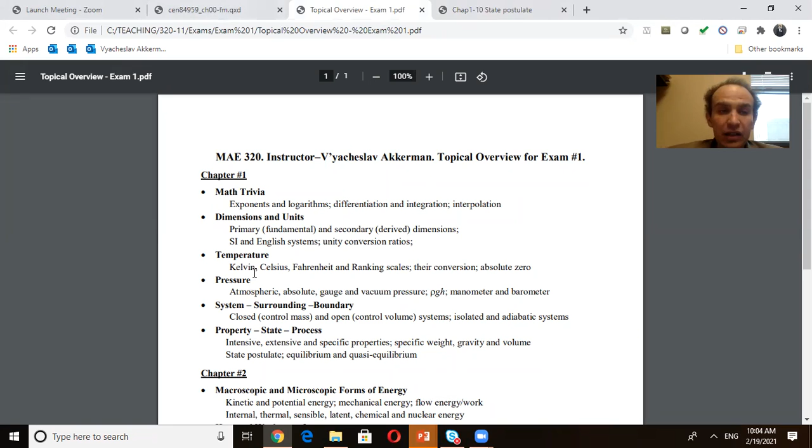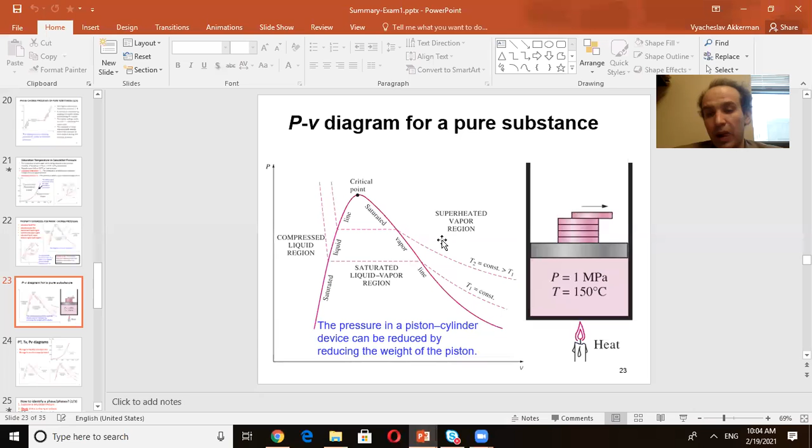What else did I send you? I sent you summary slides. This summary is really the essence of what has been in 3 chapters, just a brief summary. Now, please don't get misled and don't overamplify the material. The worst scenario is when you prepare for your exam based on my summary slides and nothing else. Then you fail, believe me. If you ask me the morning before the exam where your property tables are, I will tell you where they are, but you fail. You will not have time to complete it. You should do everything else. You should practice a lot. The summary slides are your last source for repetition. On Thursday evening or Friday morning, it's good to go through them to repeat. They are not to replace your textbook and my lectures, believe me.

Now, if you are not prepared, and you need something, it's still some source. If you don't have time to read your book the night before the exam, okay, you still have the slides to go through and try to get some reasonable score. That's my help. But please don't overamplify it. Your key point: do your homeworks, do them yourself, and then it will be okay.

If you understand when I'm solving a problem on the screen, or if you understand my solution of your homework, that's great. It's better than if you don't understand it, but it still does not guarantee that you solve this at your exam. After you see the solution, you should close it and solve it yourself from scratch. Only in this way can I guarantee that you will do it yourself at your exam.

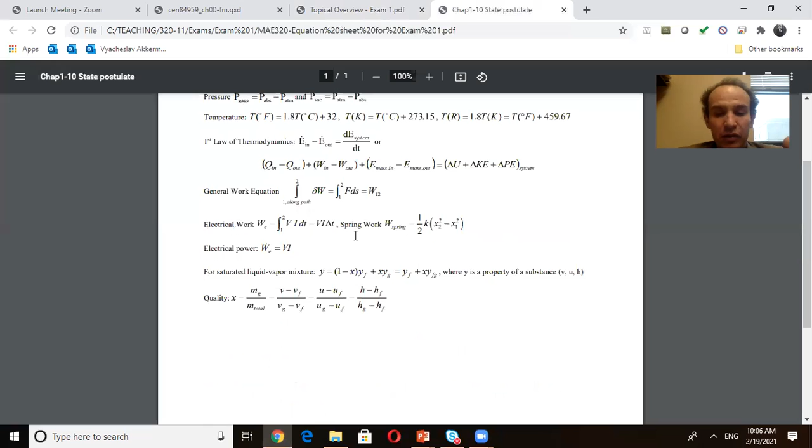Okay. Now, another thing I sent you is what we call a list of equations. First, this is tentative. Basically, you are expected to write your exam without any notes; you should memorize everything. But I know it's difficult, so we allow a list of equations of up to 1 page, which will be included in your exam. And it may be different from this. What I sent you here is tentative, okay? It's tentative, but it's fruitful for you to take a look to make sure you know it.

And please, don't blame me later saying, I was preparing based on this list of equations and you gave something else. Yes, I may give you something else. Your knowledge should not be limited by the summary slides, list of equations, and topical overview. Everything from chapter 1 to 3 can be there, believe me. I am here to help you, but I am not replacing the whole exam. So please realize. Okay, does it make sense? Any questions?

Now, today we are completing this chapter. We almost completed chapter 3, and you are ready to do all the homework except the last problem. And today we will be talking about ideal gas. And I told you in advance before we start, what are the conceptual mistakes students make?

Because ideal gas is the last topic of this chapter, and then you will have an exam, people will use the ideal gas law anytime, anywhere. You apply the ideal gas law for liquids, for solids, for ice, for whatever. So please realize, you should use tables. Tables are your major source. Ideal gas happens very seldom. Most likely, your substance is not an ideal gas. And if it's an ideal gas, it should be justified.

Does it make sense? So don't use ideal gas unless you have some understanding of why you should use it. Do you agree? Do you understand this? Okay, great. So, questions?

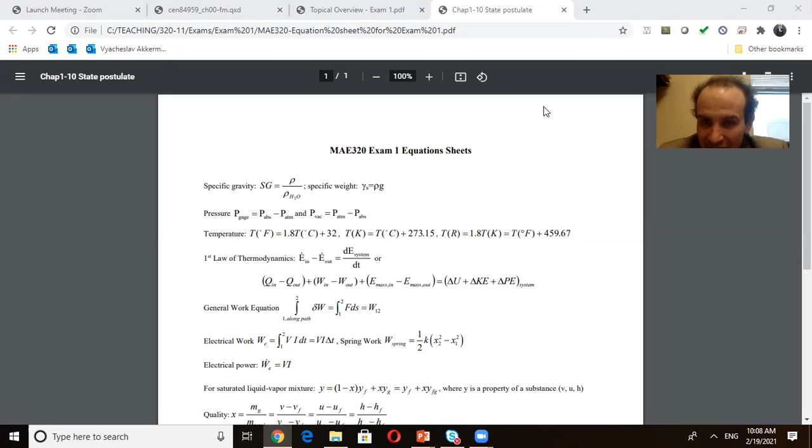Yes, the exam may require drawing of PV and TV diagrams. It may require. And also, again, I told you, identification of phase and the ability to identify the state on PV and TV diagrams. It's a major assignment you may have from chapter 3, right?

That's most important. So let's go back to part C of the slides I sent you yesterday, or you see it on my screen. We will talk about properties of ideal gas. Our objectives are to understand how to apply the ideal gas equation, and also to distinguish ideal from non-ideal gas, which is even more important. Most of you know the ideal gas equation, but to distinguish ideal from non-ideal is something new for many of you.

So let's do it. So let me ask you, what is ideal gas? How do you feel it? Please write down or whatever. What is ideal gas? Yeah, you may know it's a model, right? There is no ideal gas in reality, but for some situations, some gases, this is a good approach that we use.

No, it's not gas at saturated point. It's something different. Yes, first of all, you're right that it should be superheated, because it's gas, right? A saturated liquid-vapor mixture or solid-liquid mixture cannot be ideal gas. But not all superheated vapors are ideal gases, right? So molecules don't attract or build charge. Yes, that's great. That's true. And anything else?

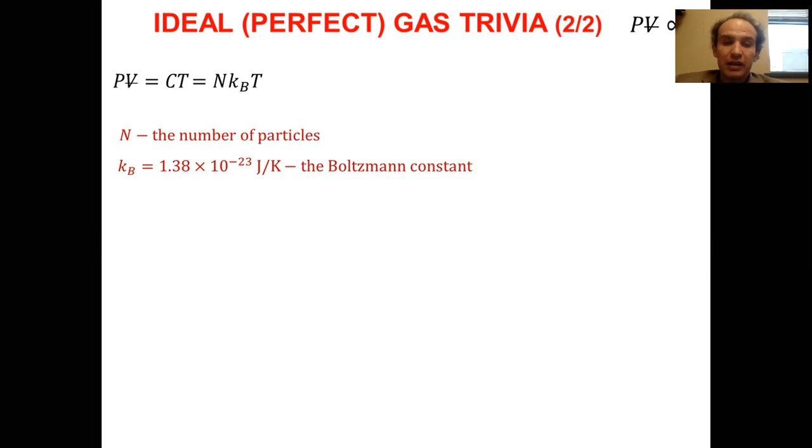And that's a good equation, but typically people don't like to deal with big values and small values, right? Why should I operate with billions of billions of billions of particles? 10 to the 27 is billion of billion of billion. So people sometimes express this formula in a different manner. People express it in terms of moles. So there is a concept of mole. Mole is a reasonable amount of matter we deal with.

So what is 1 mole? Do you remember from chemistry, from other classes? By definition, 1 mole is Avogadro number of particles, of items. I will use Avogadro, the Italian name. Avogadro number is a very big number. It's 6.022 by 10 to the 23. It's almost 10 to the power 24 items.

So realize, 1 mole of hydrogen is Avogadro number of hydrogen. 1 mole of water is Avogadro number of water molecules. 1 mole of students is Avogadro number of students. I'm not joking, it's the definition. If you have this amount of students in the universe, it will be a mole of students. 1 mole of planets will be Avogadro number of planets. 1 mole of galaxies will be Avogadro number of galaxies.

Does it make sense? Why is this number not different? Because it's convenient to use: 1 mole of hydrogen weighs 1 gram, 1 mole of carbon weighs 12 grams, and so on. So we can rewrite the equation like this. Instead of N, you express N as Avogadro number multiplied by number of moles. Here n is the number of moles, we also call it stoichiometric coefficient sometimes, and N Avogadro is for 1 mole. So here you see how many moles you have, and here's Boltzmann constant and temperature.

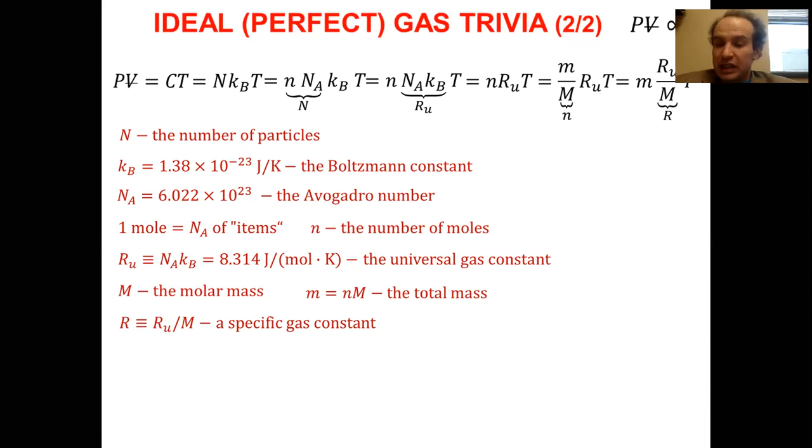But why do I write like this? Then I can rewrite my equation as follows. I have 2 items here, so instead of writing like this, I can take the fraction R universal over M and replace it by another value. So I introduce what we call a specific gas constant. It's tabulated. And then here is my equation.

So please remember, don't confuse universal gas constant and specific gas constant. Universal gas constant is this constant. Specific is when you divide it by molar mass. So specific gas constant for hydrogen is universal divided by molar mass of hydrogen. Specific gas constant for uranium will be 8.314 divided by molar mass of uranium.

Specific gas constant for students will be this constant divided by molar mass of students. I'm not joking, it's true. Although students don't behave like an ideal gas most of the time, but that's by definition. Do you understand this? So now my equation becomes like this, and that's the typical form that you see.

PV is equal to mRT, and recall R is the specific gas constant now, not universal, and T is temperature. Now I can multiply or divide both sides by volume or mass. For instance, if I divide both sides by volume, this will be my equation: it's m over V RT, it's rho RT. And that's mostly what you see in physics.

But in this class we don't prefer density, we prefer the opposite quantity, which is specific volume, because it will behave similarly to specific internal energy, enthalpy, and so on. So basically here it is, and that will be your equation. That's what we use typically, that's how we write it down. Pv is equal to RT.

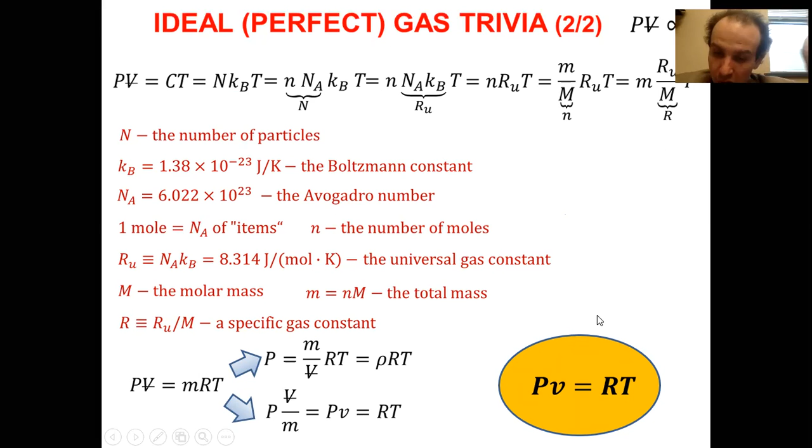Any question about this? So that's the equation we are using for ideal gas. And remember that the universal gas constant you may have in different units, like kilojoule per kilomole Kelvin. Also please realize that the specific gas constant is different. The specific gas constant is universal divided by molar mass.

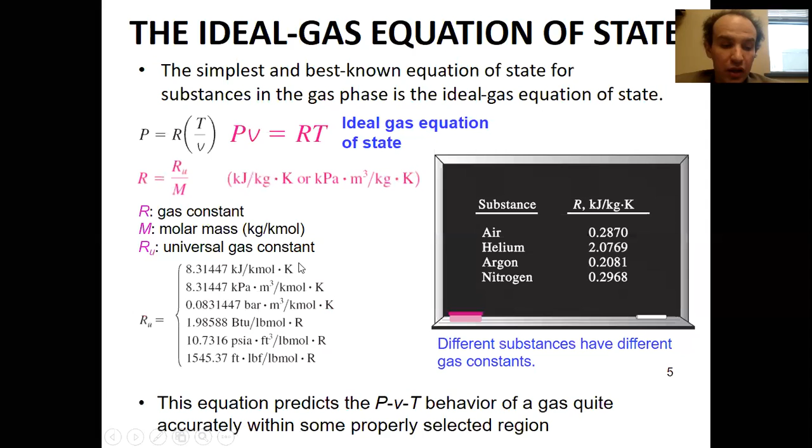I want to refer you to our property tables, your very first table, A1. Here are all the substances, and for all of them you see the molar mass, and here is the specific gas constant R. You may easily check: if you multiply the left column by the right column, you will arrive at 8.314, the universal gas constant. Please don't confuse specific and universal gas constant. Any question at this point?

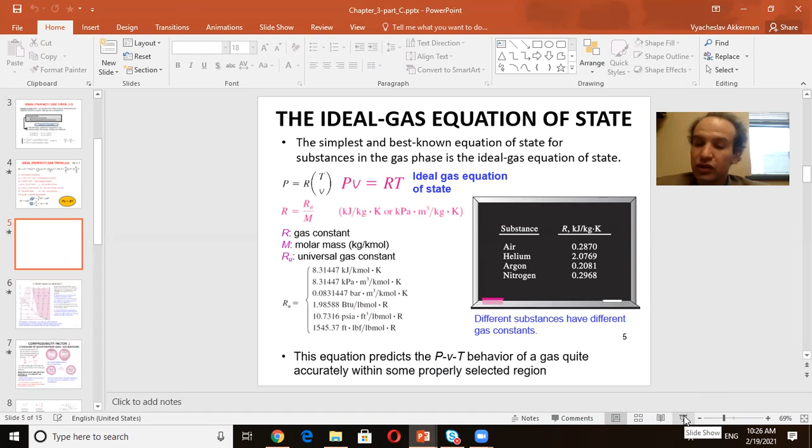Okay. Now you know what an ideal gas is. Our next question: where can you use the ideal gas law and where not, what is ideal gas, what is not ideal, when this approach can be used. For instance, is water vapor an ideal gas? The answer is sometimes, vapor is not always an ideal gas.

On this screen you see our classical T-v diagram, with the saturated liquid line, saturated vapor line, saturated mixture between them, compressed liquid and superheated vapor here. And you see here is ideal gas. When you have lower pressure, very rarefied flow, you do have ideal gas. For water, it's typically less than 10 kilopascals. When pressure tends to zero, toward vacuum, you will eventually arrive at ideal gas. But otherwise, that's not always the case.

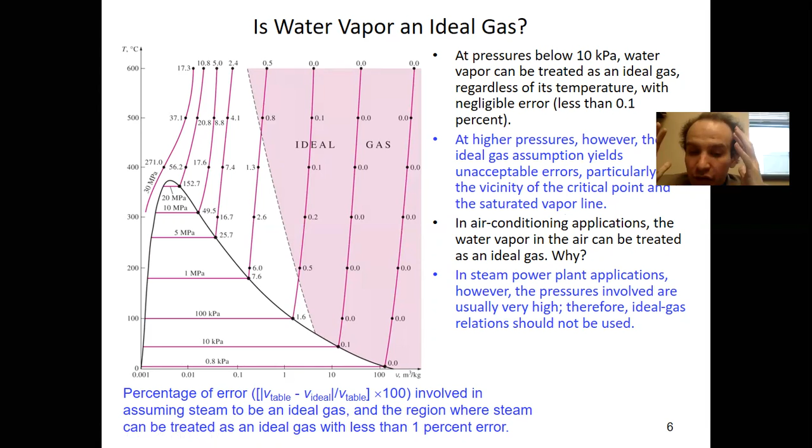Another point: ideal gas is something far away from the critical point. Supercritical condition is definitely not ideal. So whether it's ideal gas or not will depend on how far you are from the critical point. The critical point is here, remember? How far you are from it determines if it's ideal gas or not.

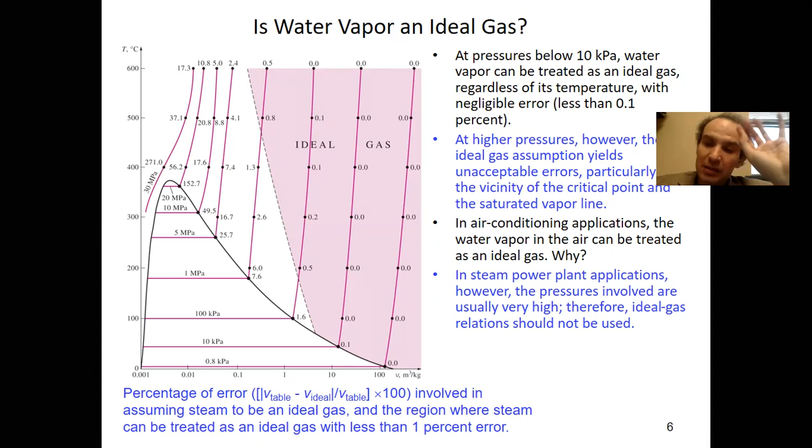So what can we do, how do we measure it? Please listen, this is the most important part of this lecture. To clarify this, we introduce the concept of compressibility factor. By definition, for any substance, the compressibility factor Z is Pv over RT. So, what is it?

Why do we introduce it like this? If Z is equal to 1, what does it mean? If Z is equal to 1, then you will have PV equal to RT, and it's an ideal gas by default. But generally speaking, you don't arrive at this. You will have something like this: PV is equal to ZRT. So you will have some coefficient here, right?

And actually, what also happens here? You may also see what Z will be, because it's V over this value. If it's an ideal gas, what is the value that I crossed? It's the ideal gas one, right? So basically Z is the actual volume divided by the volume it would have if it were ideal. So this is a measure of how you deviate from ideal gas. Do you understand?

Obviously, if pressure tends to zero, your real gas tends to ideal gas. But otherwise, it may not be the case. So for an absolutely ideal gas, Z is 1, while in reality, Z may be different. So what is Z? Z is actual volume divided by ideal volume. Do you understand? Now we arrive at a nice criterion.

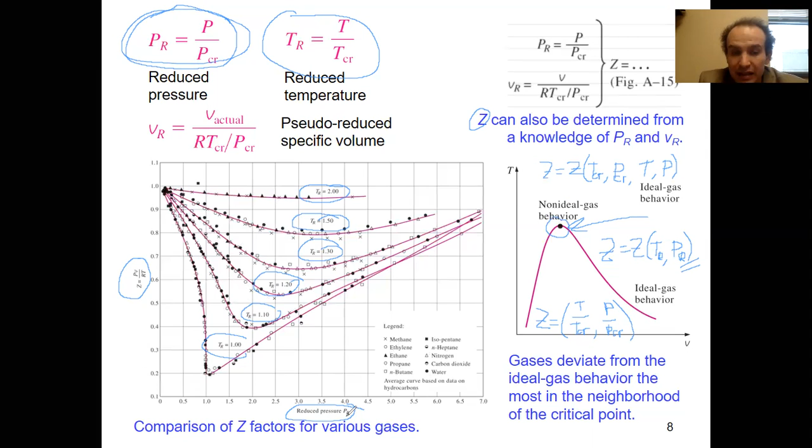Please realize. It means that when you do this appropriate rescaling, all your substances behave identically, because all ideal gases behave identically. Do you understand this? That's why we scale it. Again, if I make this plot versus real pressure or versus real temperature, of course, they will not fit together. They will be distinguished. They will not collapse. But here, they do. That's what we are doing.

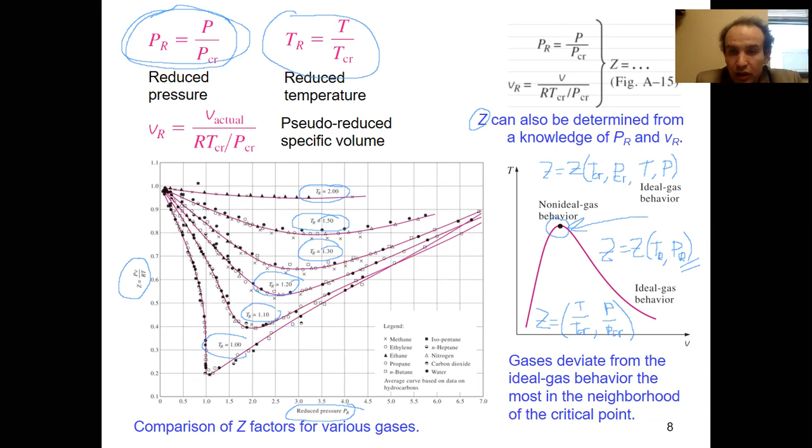So basically, I put it in the same picture here on this big screen. You will see that if I introduce the scaling for reduced pressure and temperature, all my items will collapse onto these lines. And that's what you will be doing next. If you have these diagrams, graphically you can identify: take your pressure and your temperature, then go to your table and find what is the critical pressure and critical temperature.

Here you are, right? So for instance, I talk about air. Here is my critical temperature for air, my critical pressure for air. It's the same table A1 that we discussed today. It's a key point for ideal gases. For methane, for instance, here is my critical temperature and critical pressure. Temperature in Kelvin, pressure in megapascals. So you take it, then you take your pressure and temperature, make a scaling, and then what?

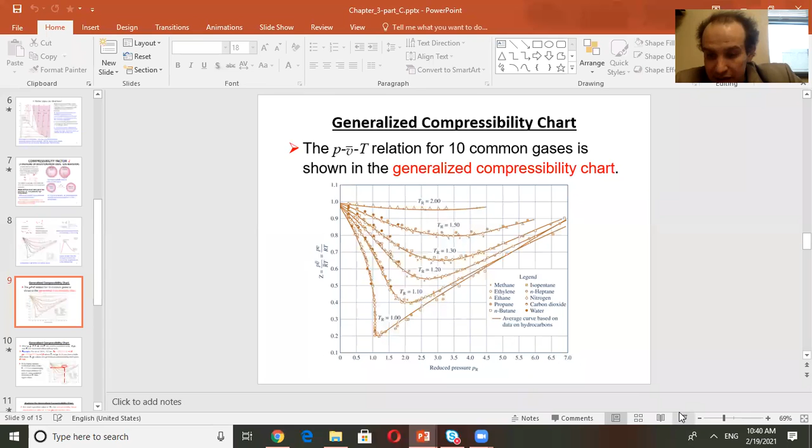If you make a scaling, then you will see where you are for your given pressure and temperature, and you will find your compressibility factor. If your compressibility factor is close to 1, it's an ideal gas. If your compressibility factor is far away from 1, say 30%, it's not an ideal gas. And you may see here: if your pressure is very small, then your reduced pressure tends to 0.

And definitely in the vacuum, all gases are ideal. When your pressure tends to 0, it's ideal gas. But generally speaking, when you deviate from 0, when pressure goes higher, you deviate from here, and basically it becomes non-ideal gas. But later you may see, depending on temperature, points come back. Why do they come back here?

Because of temperature. Even if you have high pressure, if your temperature is high, it means that your sensible energy dominates over latent, and still your particles are free. That's why it's still ideal gas. Does it make sense? Okay, I like analogies from life, just as an illustration of what we're talking about here and why we did the scaling.

Imagine I have my desk here, okay? And I put 5 small mice on my desk. They are rarefied, only 5 mice, so they may look like ideal gas. Let's say I stand up, go a little bit far away from my desk, and make a photo of them. If I make a photo from 10 meters, what will I see? I will have an empty desk and 5 gray points on it, which are mice. Okay?

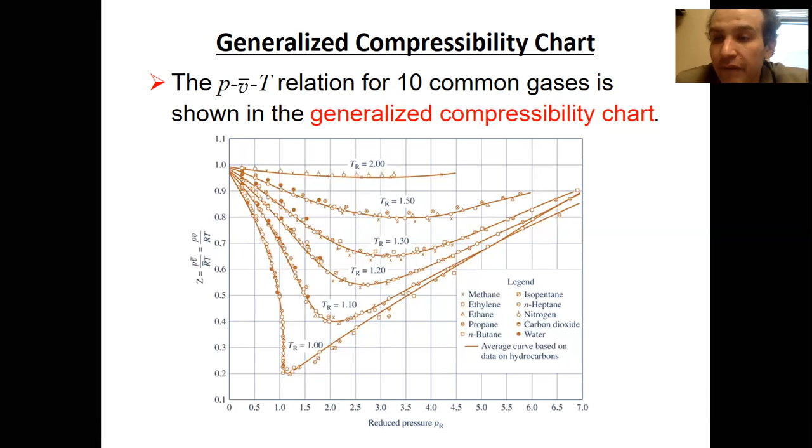Great. So an example. I will finish the lecture soon, but just a quick example for your homework, and we may have a similar example in your exam, and definitely in your homework number 6 you have it. So how to find the compressibility factor? For instance, let's say I have air at 200 Kelvin and 132 bar, okay? Is it ideal gas or not? How to identify?

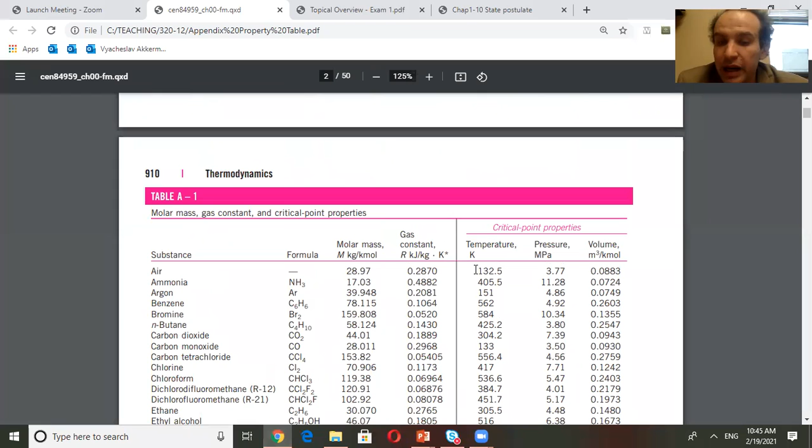What do I do? 200 Kelvin, 132 bar. I will do the following. First of all, it's air, so I want to find my reduced values. To find reduced values, I will go to my table and see for air. What do I have for air? Here, for my air, my critical temperature is, do you see my screen, 132.5 Kelvin. So it's quite cryogenic.

What is my critical pressure? It's about 4 megapascals. And you will see, because this temperature is so cryogenic, that's why air in the room typically can be treated as ideal gas.

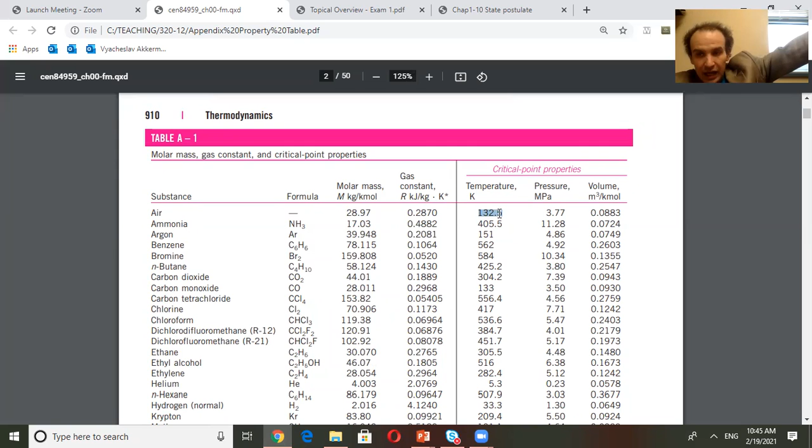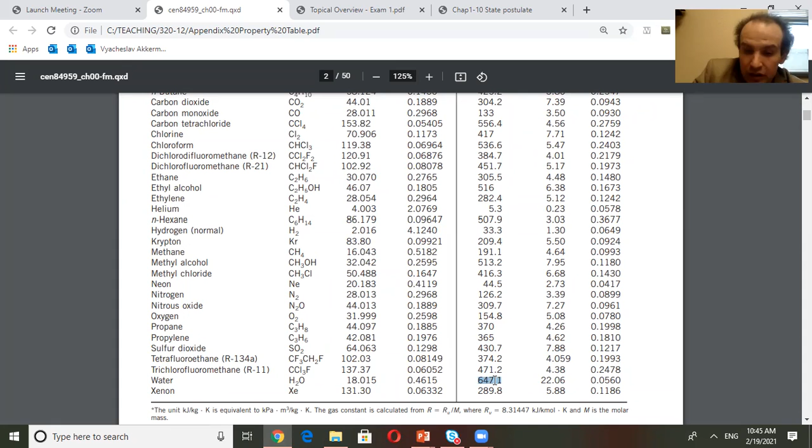But for instance, for water, H2O, the critical temperature is 647 Kelvin, right? It's like 350 degrees Celsius, it's very hot. So our water vapor, even boiling water vapor, almost never behaves like ideal gas. Does it make sense? Okay, so this is my critical pressure and critical temperature.

What do I do next? I will take my pressure and temperature, which are 200 Kelvin and 132 bar, and scale them. So what will be my reduced temperature? My reduced temperature will be 200 over 132 Kelvin. It will be 1.5. Agree?

Yes. And what next? Next, I will have my reduced pressure. It will be 132 bar over 37 bar. Remember, bar is 100 kilopascals, so you can switch it to megapascals. It will be 3.5. So now I know that I have my reduced pressure and I have my reduced temperature.

Correct? So now I know, and what else I know? I know that Z is a function of these two values. My Z is a function of reduced pressure and reduced temperature. So what I will do? I will take this point now. So this is my reduced temperature. And what is my reduced pressure? My reduced pressure is 3.5 and my temperature is here. So here is my point. What is Z? So Z is 0.8.

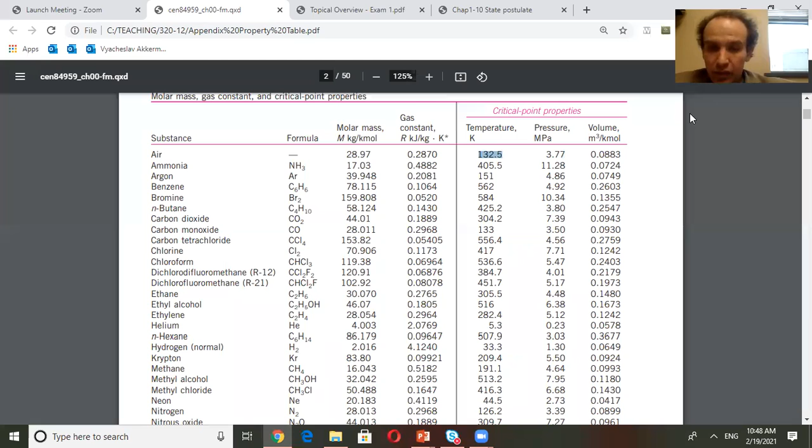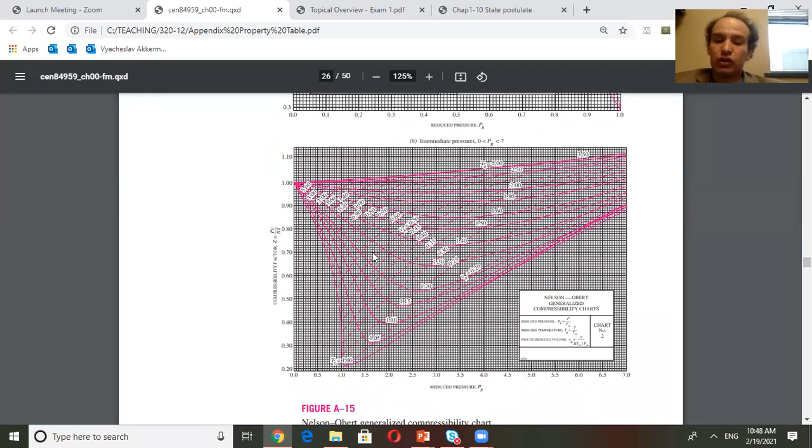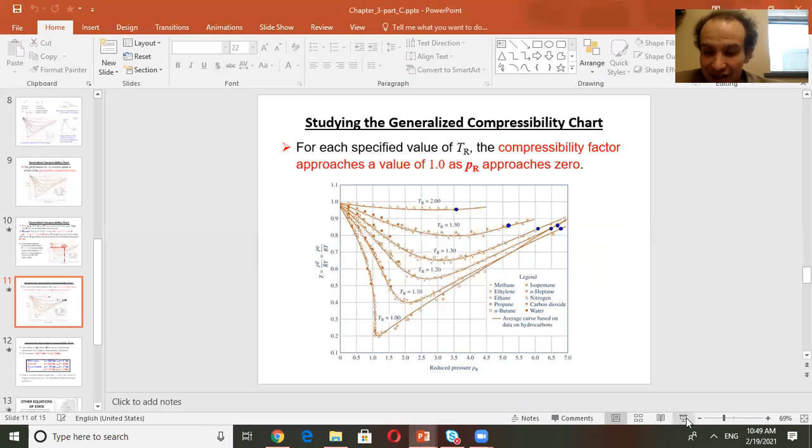Okay. Now, yes, if you go to this chart, figure A-15. Yes, this chart is in the table. It's figure A-15, and you have two diagrams. Typically, you see the diagram at the bottom. The diagram at the top is for small reduced pressure from 0 to 1. For big scale, you use this diagram. Yes, it's A15. We call it the Nelson-Obert generalized compressibility chart. And why we call it generalized? Because I generalized mice and elephants, right? Because all substances go together to get ideal.

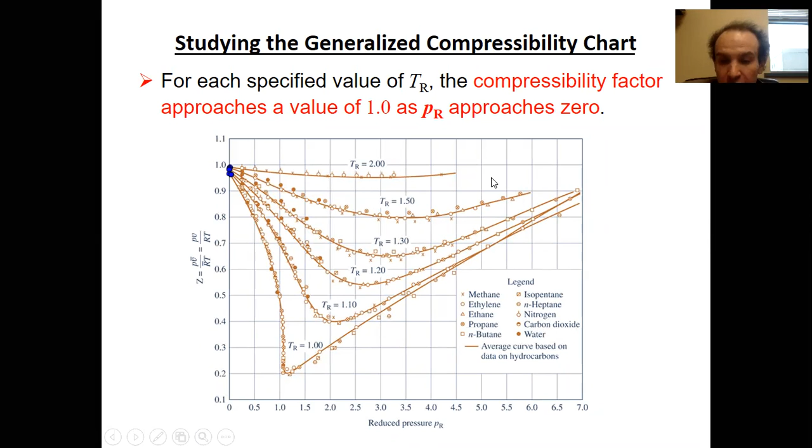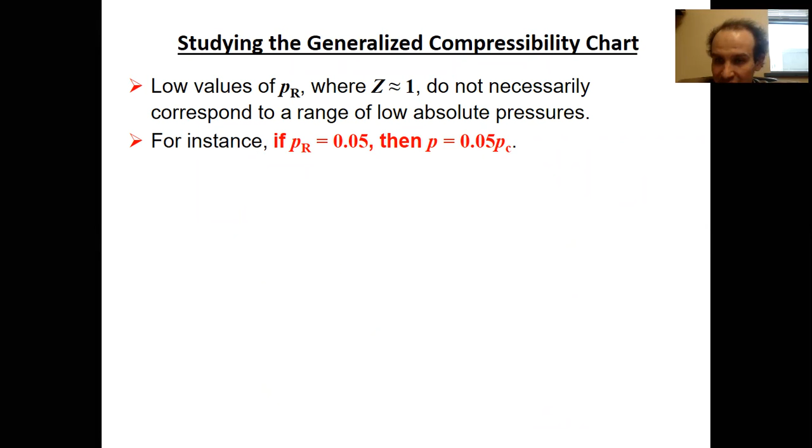So let's say I will consider the case when reduced pressure is 0.05. Where is reduced pressure 0.05? It's here, right? It's a small value. So you are here, that you have ideal gas. But in fact, a very small reduced pressure may still be a large one. If my reduced pressure is 0.05, it means that my real pressure is 0.05 of my critical pressure. So it will depend on my critical pressure. Is it mice or elephant, right? I need my working desk to observe mice, but I need a stadium to observe elephants. It's a different size.

For instance, for water vapor, your critical pressure is very big. It's 22 megapascals, 220 atmospheres. It means that my reduced pressure of 0.05 corresponds still to a big value, to 11 bar, 11 atmospheres. Okay? But in contrast, for ammonia, my critical pressure is twice less, so this reduced pressure is at 5.5 bar. For carbon dioxide, CO2, what we breathe out, I will have critical pressure of 73 bar, and my reduced pressure of 0.05 will correspond to 3.7 bar. For air in the room, as you already know, your critical pressure is 37 bar, 37 atmospheres, but your reduced pressure of 0.05 is 1.9 bar.

So do you know what we did here? We took a place where water, ammonia, carbon dioxide, and air behave identically. If you want a cell for elephant, deer, rabbit, and mice, you will have different scales, right? The same here. For water vapor to behave like ideal gas, you need 11 bar, but for air only 2 bar. That's why air in our room is practically ideal and water not. Air at 2 bar behaves like carbon dioxide at 3.7 bar, like ammonia at 5.5 bar, and like water at 11 bar. They all behave identically, but absolute pressures are different. Elephants on a stadium behave like deer in your backyard and like mice on my desk. Do you understand this? Excellent.